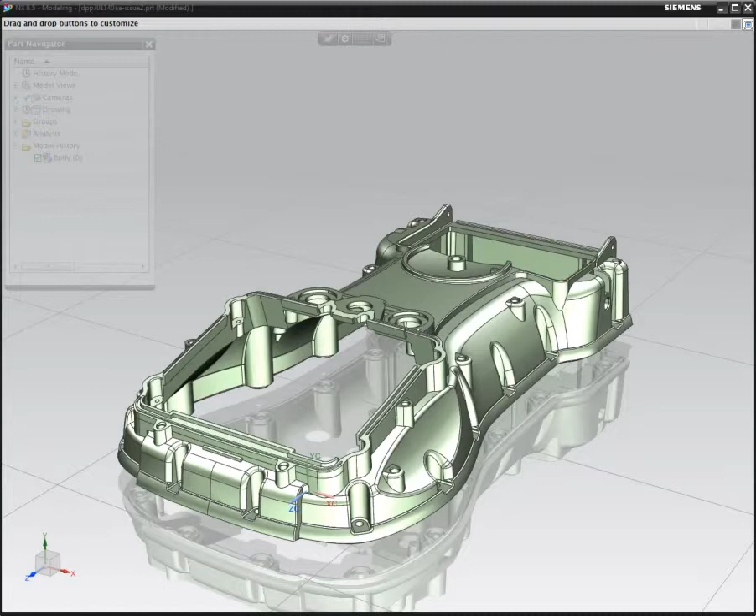In this demonstration, we'll show how easy it is to use the new product, the Easy Fill Analysis from Moldex3D. We first take a look at this part, and then we go ahead and run the analysis.

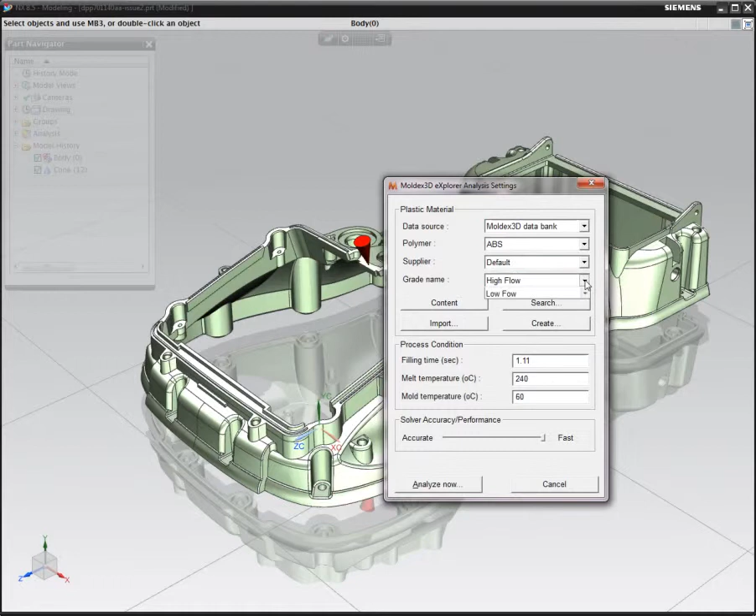We can define a specific gate point. There could be one or multiple on this particular part. In this case, we're going to define one at this particular point, and then go into the analysis setting. We can look at all these different settings from the source, the polymer, the supplier, and the grade name, and then go ahead and initiate the analysis.

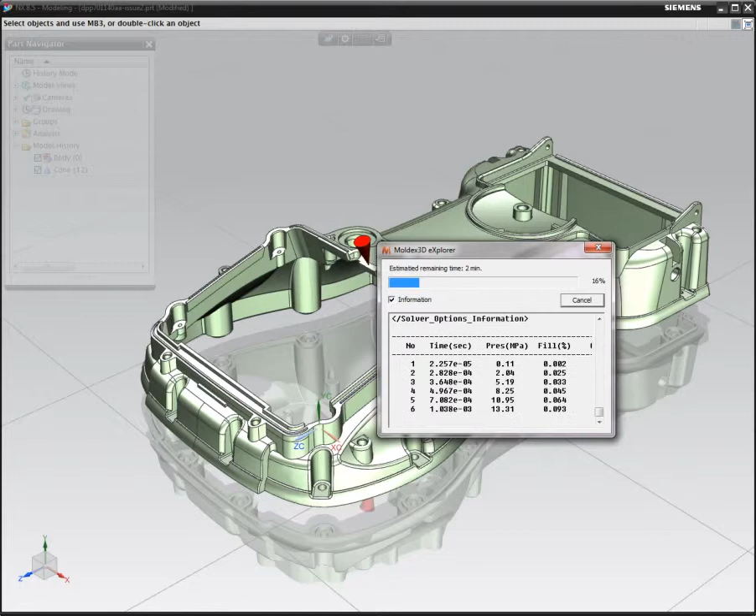Using this analysis, it will define all the properties that we set, and then analyze based on the complexities of the part and create analysis of the results. So now it is going through and capturing all these different points and locations, and once this analysis is done, we can go ahead and review the results.

So now let's take a look at the results.

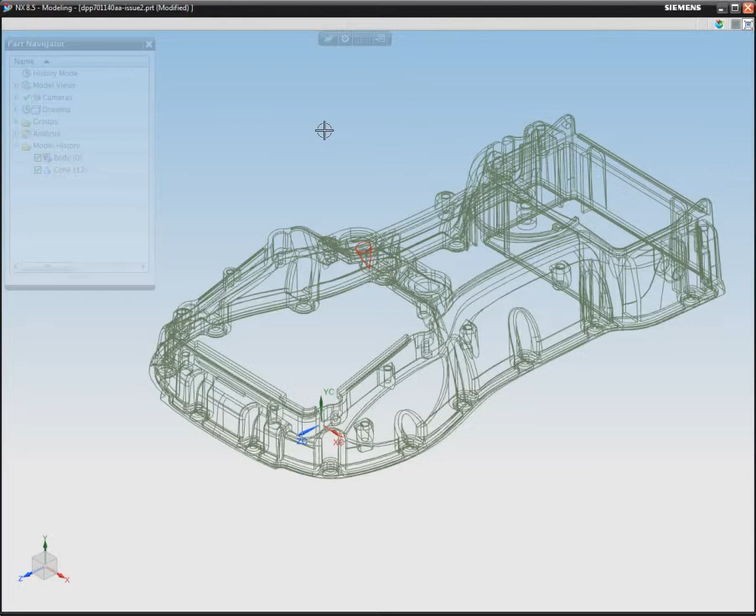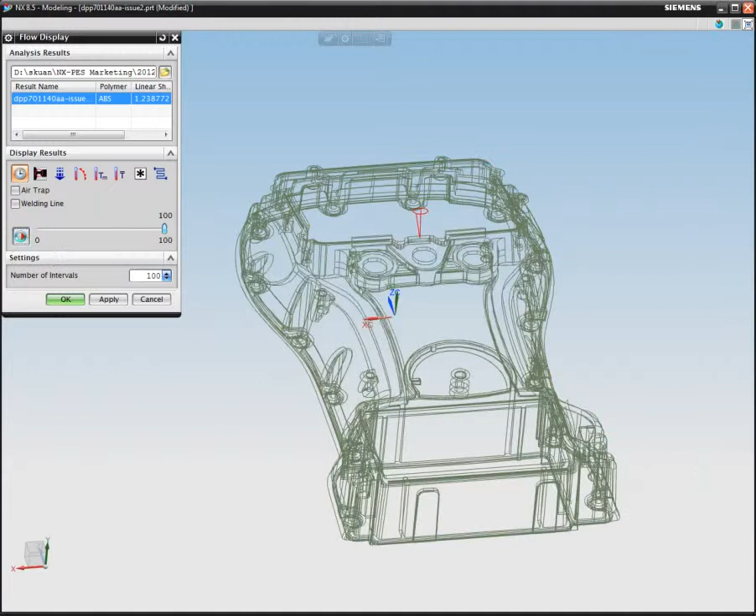In the result display, we can see that there's a variety of different settings. We can go ahead and change the intervals to 100, which is the maximum. We can run it, and we can see how the flow of the material is through the part. Then we can review that at a different angle and see if there's anything or any area that we need to highlight or capture.

So we look at it from the cover at the top. We can also look at it from the bottom of the part, and once again rerun the analysis.

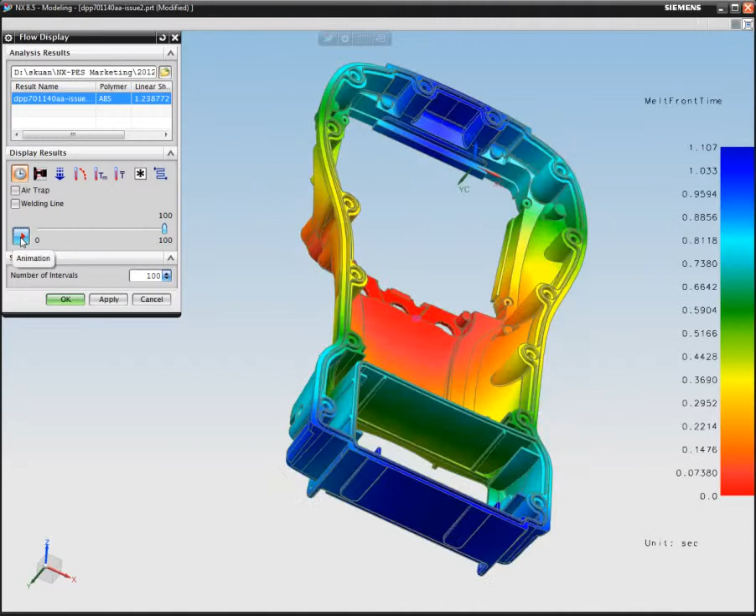After this is done, we can also look at potentially where this part could have some air trap locations. We can see from all these bubble definitions the areas where air could possibly be trapped. And then we can also look at the weld line as well.

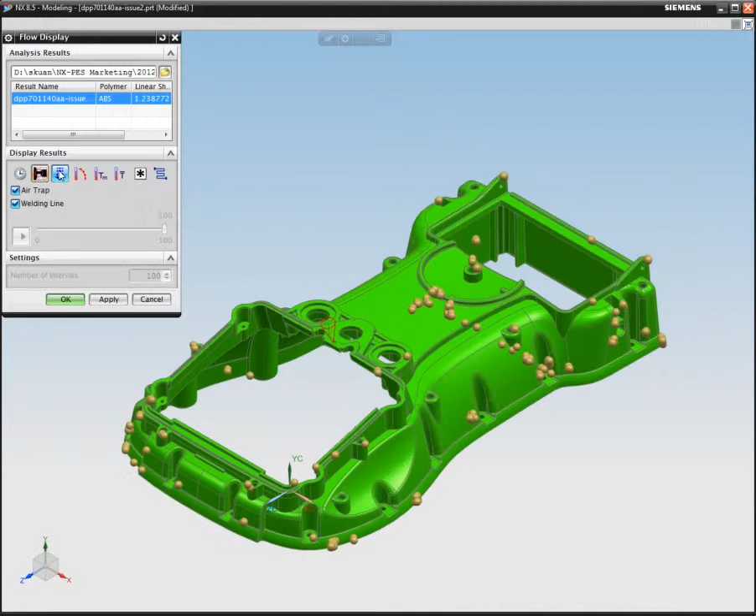Then we can look through each one of those, from gate contributions to pressure drop to melt front temperature to maximum temperature to average temperature, and so on. As we go through each one of these functions, we can see there are results for each one of these analyses, defined through the properties we set for this part.

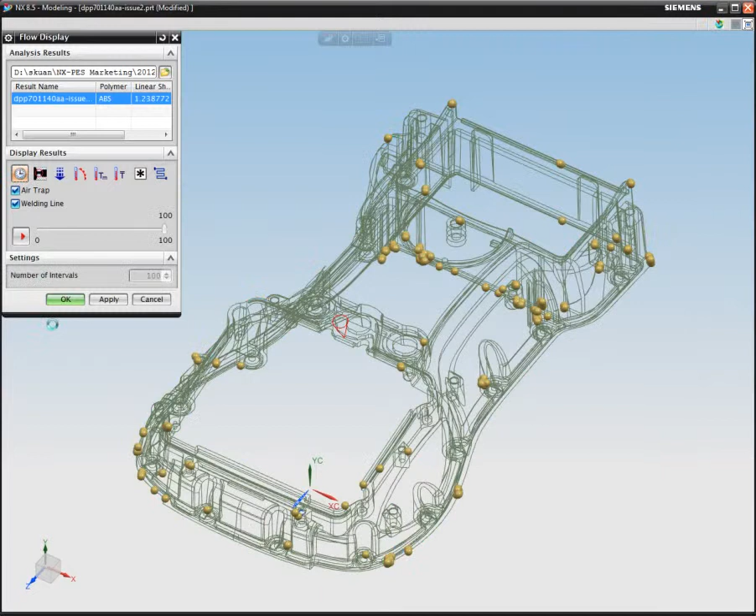So now we've seen all the functions available within a particular part as we define a single gate. That concludes our presentation.